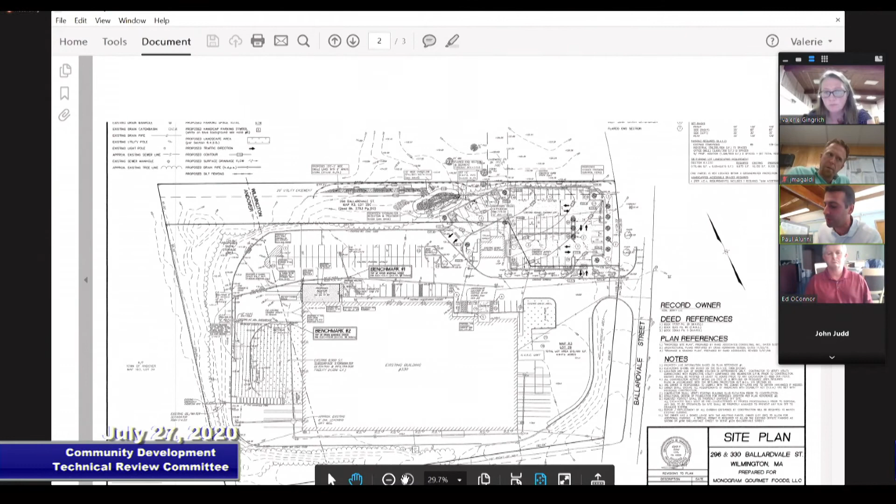And the bigger comment I have here is, and this might be a typo on the soil testing log, but you need 2 feet of separation from the bottom of the basin to groundwater. By my read of it, it's like around 1 foot. And if you raise the parking lot, that low point in the parking lot too, you may be able to lift that surface up as well, so everything kind of lifts up, and you'd meet your separation requirements.

And lastly, as far as high notes, just if you revamp the O&M, we'd like something a little more specific to the BMPs that you have out here. So just include the basin, the outfalls, the riprap or overflow, and the swale.

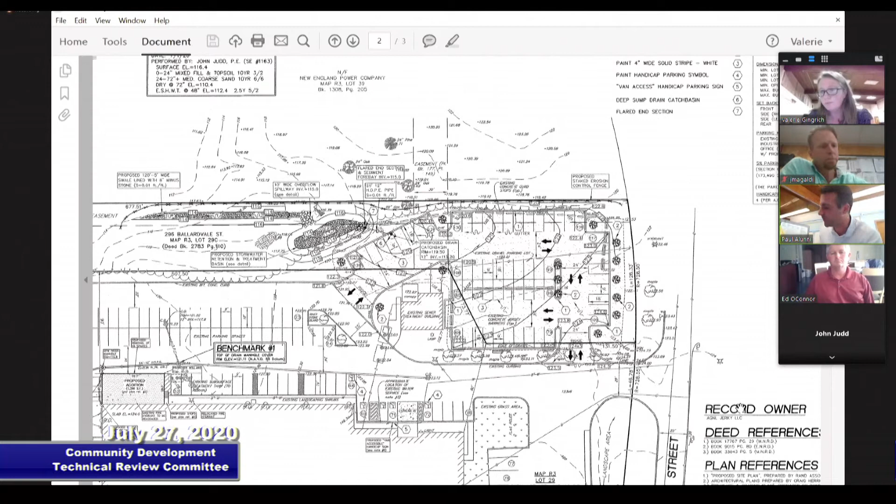So those are the highlights, I guess, of my comments. Certainly, I would say they're the major comments that I had. And I'll write up the rest in a memo this week. Thank you very much. You're welcome.

Thanks, Paul. Sure. Shelley, do you have any comments on this one? No, I don't have any comments. Okay, thank you. Do you have any comments? No, Val. Okay.

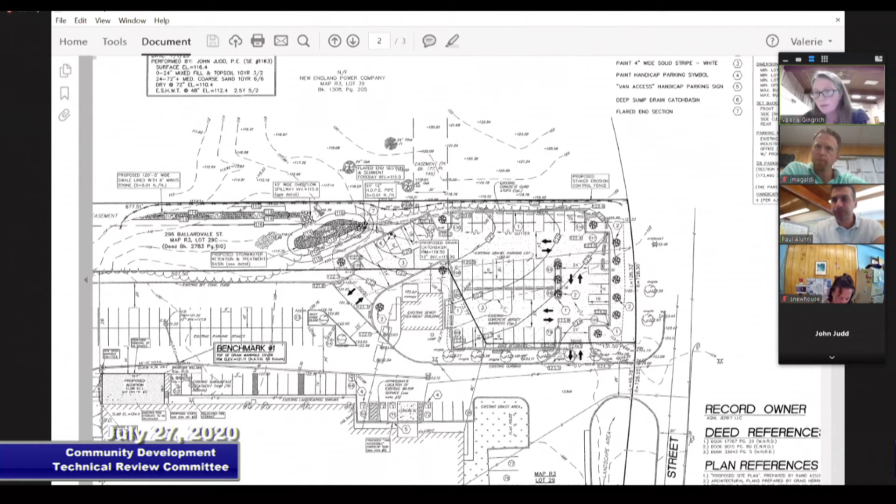Let's see. Anyone else with comments? I think I covered everyone. Anybody with any questions or anything for us, John or Ed? And we'll, as we typically do, write up our comments and get them out to you as soon as we can.

Do we have just a schedule, just so I know my marching orders, Valerie? As soon as I get Paul's comments, I guess I'll incorporate those with Sierra's comments. And then I have the next hearing. Is it until these are all resolved with Paul and Sierra? Are we still going to be on the agenda for next week?

Yeah, I would recommend that, just to give the planning board sort of an overview of the project in general, and then let them know that you're working on the list of comments, but I would introduce the project to them. Okay.

All right, well, if you have any other questions or comments, you know where to find us. And like I said, we'll get the comments out to you as soon as we can.

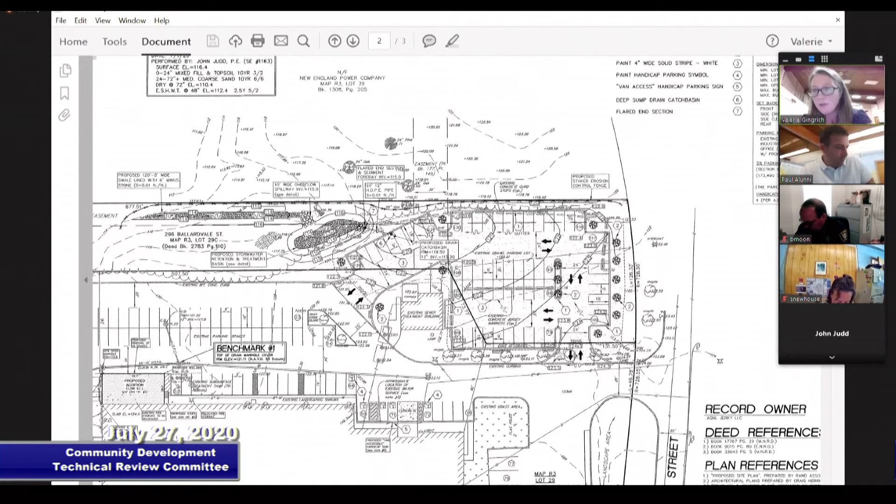Hey, Valerie. Yes. This is Ron Best. I just have a quick question. So just what I'm hearing, sounds like we've got some clerical, administrative, and obviously important things to address, but assuming that all these are addressed properly and to Paul's and everybody else's satisfaction, is it fair to say that this, along with the dock expansion permit, is there, at this point, any contingencies that wouldn't be met, assuming we meet all the ones we talked about today for the parking that you're aware of?

I guess, Ron, I'm not sure quite the question. Can you say that again?

Our ultimate goal of this parking is important to us, but also we have a dock expansion permit that we're going to be talking about. It's a building permit for the 4th. One of the things that the dock expansion did was it encroached on parking, causing our parking issue. And so we expect that this parking lot would fulfill our limitation or our reduction in parking problem that we had on the original permit. So last I knew, there was no issues with that permit other than parking, which we believe that this plan will address. And I just wanted to confirm that, or make sure there was nothing out there outstanding that we hadn't heard of or thought of yet that might shut us down.

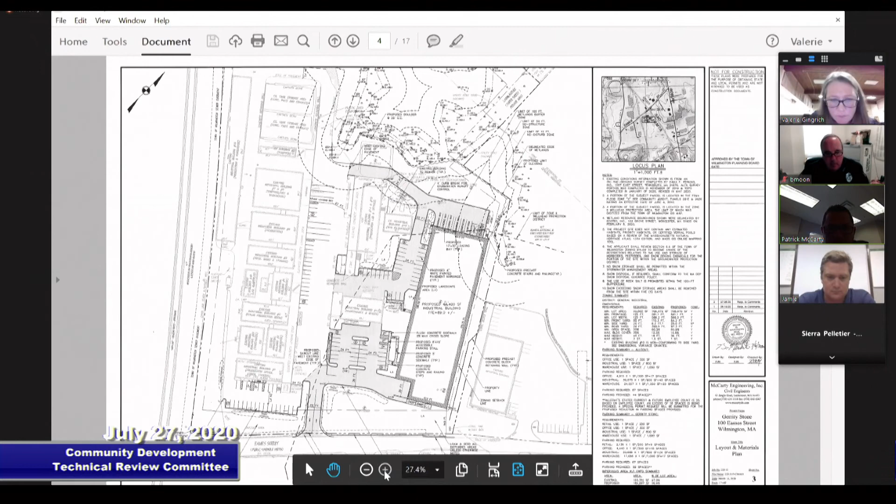One more comment, I guess, pertaining to dumpsters. I wanted to see the existing and proposed dumpsters and compactors over on the Allcoat side. I did see a few out there when I did a site visit, and I think one or two may be within where some parking is being proposed. So just wanted to see where they currently are and where they're proposed to be on the plan set. I think they're showing, Sierra, along that raised concrete walkway that goes along the face of all those buildings. Like, I can see, yeah, if you zoom in.

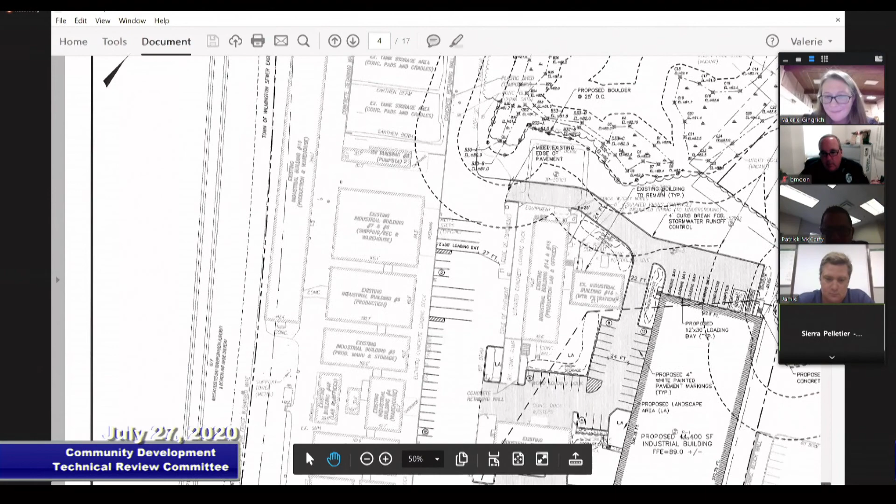Not cooperating. I think there was a compactor right there, yeah, shown. I think that may have been one of the ones I saw on site. I also saw one to the south, sort of in front of that building closest to the street, as well as one up in the area of where the proposed parking is. Yeah, sort of around there.

Yeah, so I think right now, I'll just jump in, Sierra. They obviously don't - I think they're going through a couple things, right? As part of my purchase of the property and their lease back, they are moving out of a couple buildings that we're going to demolish, and they're reconfiguring interior space. So they're starting to do that cleanup now. So some of those dumpsters may simply be a function of that work. I also think they haven't really had to be efficient with the use of their dumpster locations, so things have kind of just been sitting because they can be.

We've had conversations as part of all of this planning, and the dumpster location that Patrick's showing is adjacent to where they're seeing most of their waste. They really don't create a ton of dumpster waste. They receive 55-gallon drums from a truck on a pallet, and the material from those drums goes into their production, and then the empty drums get sent back out on the truck. So I think what we're showing is sufficient for their needs, at least that's what they're telling us. But I'm happy to dig in more if you need more information.

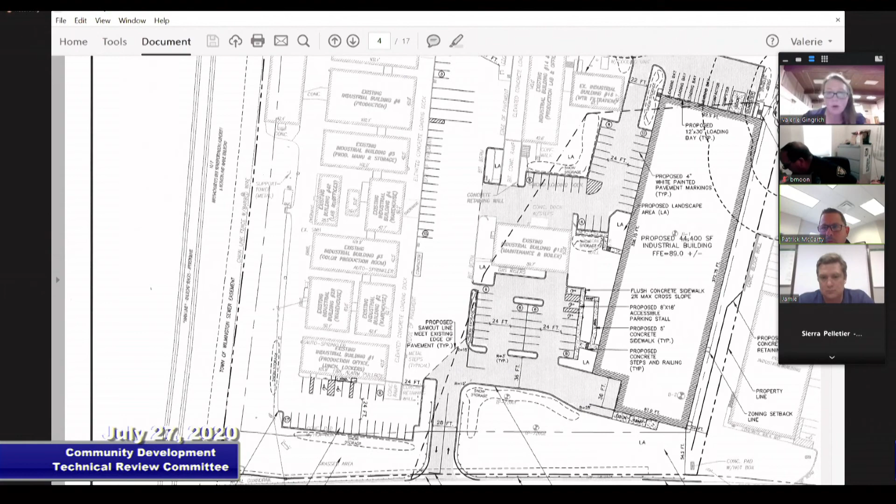Val, is this your screen? Can you pan over? So this one right here, the one at the end. Yeah, if you can find a different spot for it, but I don't think the commission is going to like to see that there.

Okay, all right, that's all I have. All right, Paul, do you want to go next? Okay.

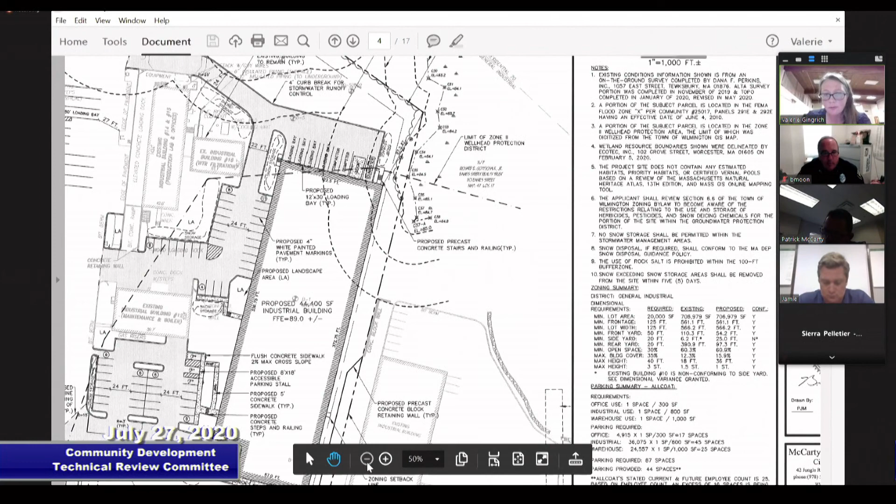Sure. Thanks, Patrick and Jamie, for the overview. I talked to Patrick on Friday and only had very minor comments left regarding stormwater. There's only 2, and they're so minor that if the board were to approve the application of the permit, I'd be okay with them being conditions. I think they did a great job addressing our concerns with stormwater. I certainly appreciated the collaborative effort there, Jamie and Patrick. That's really all I got.

Great. Thank you, Paul. Thank you. Yeah. All right.

Jamie, any comments on this one? No, not really. I guess I was just curious on the fire department's review. I noticed there's nobody today from the FD, but have they expressed any outstanding concerns that you know of, Val? They haven't. Yeah, I'm just curious on the layout, just making sure that they're satisfied with access to the buildings is all.

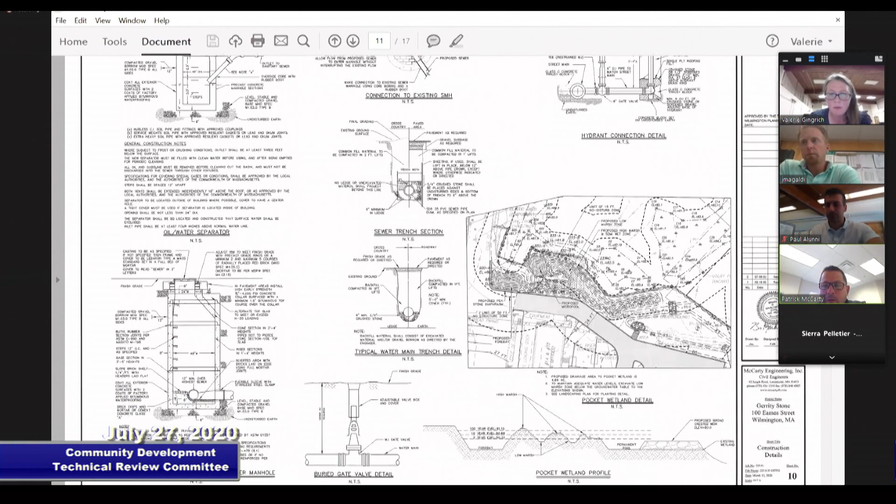Really an issue for the fire department, not for DPW, but that's really all I had. I did send them the plan that showed the layout and also showed all the hydrants to remain. And they did send an email back confirming that the hydrants to remain provide adequate coverage.

Actually, they said it opposite. They said I was okay to remove the one I was proposing. We did provide a truck turning plan that Val's showing here.

And Joe, any comments? No, all of my comments from last round were addressed, so nothing now. Okay, and so I think...

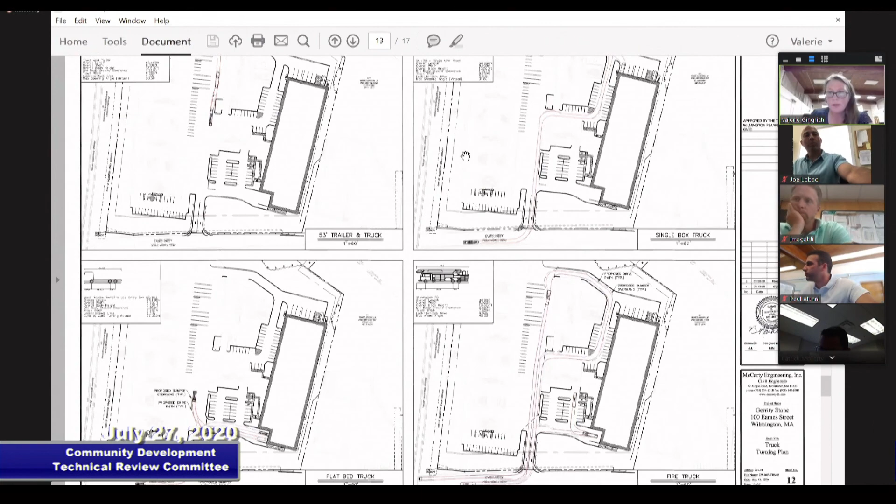And then some of the other comments we may be able to work into conditions for the board's review next week. But we'll be in touch with either a comment letter or a draft decision that you can review prior to the meeting. We would prefer the latter.

Yeah, we would too. I think we should be able to work it all into conditions, but I'm not looking at the list of things in front of me right now. So that would be the goal, is to get those conditions written up for the board to consider, so we can hopefully get a vote for you guys next week, and you can go and do your plan changes and be on your way.

Excellent, thank you very much. Yeah, any questions for us? No, I think you just answered it. That's our hope, obviously, is that hopefully next week we'll have an action, and any of these little housekeeping items could be conditions that we would adjust before we gave you a set of plans to endorse. I think the one thing, if you could provide more to explain the decrease in parking for Gerrity, I think that would be helpful.